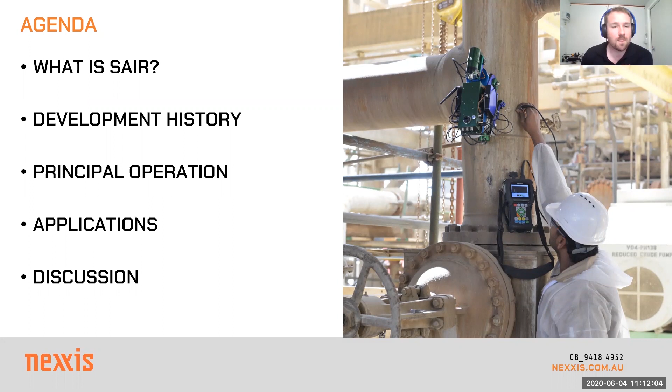So SAIR is Saudi Aramco's inspection robot. It's essentially a wireless crawler capable of performing ultrasonic and visual inspection, and it was developed in Saudi Aramco, and it's been tested and piloted in several of their facilities.

So it went through quite a development through that process of field testing. Then a company called Arabian Robotics Company, which is a joint venture with Saudi Aramco, was established specifically to provide non-destructive testing services into the oil and gas industry and be an avenue to feed in robotic solutions. So Arabian Robotics Company, ARC, is who we've been partnering with to bring this product in.

And they've been quite good at bringing this along the way. I guess the objective for Nexxis is to be able to take a technology like this, analyze it, work out where it's going to work best for our customers, and then build a knowledge base around it so we can make sure it's used in the field correctly, that we can provide training for it, and basically just get it running in the field as it's been intended.

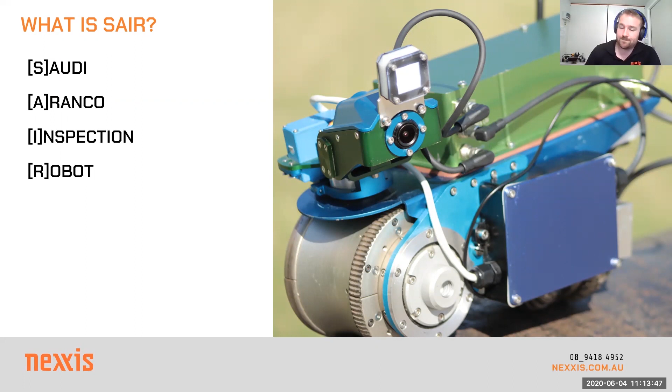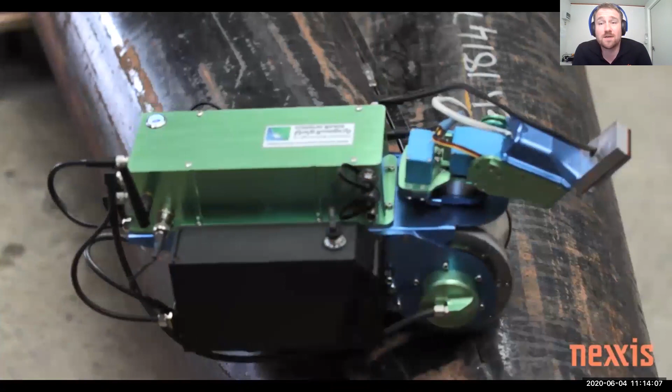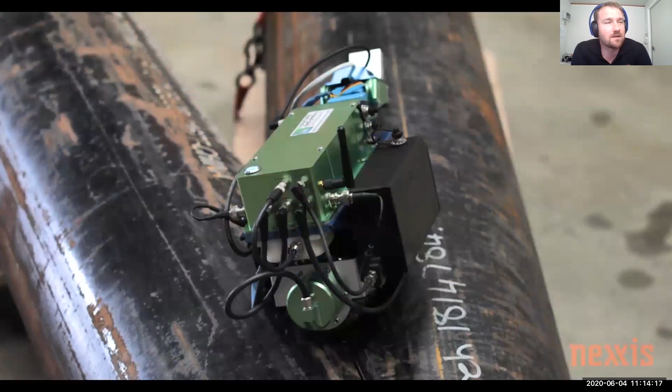So hopefully the video plays through nicely, but this kind of summarizes the idea of SAIR. It's a wireless magnetic crawler robot, capable of doing RVI inspection with a camera, and UT thickness inspection with a probe mounted underneath. Its unique feature is that it's wireless in nature, which is pretty different to most of the other crawlers we've had in the past, which have a tether for data and communications. This has everything running on board, which is quite unique.

And then the other draw card that really drew our attention to it was the wheel mechanism on the front, which has this unique design that lets you transition over curved surfaces without getting jammed up, which I'll touch on when we start looking at the wheel assembly.

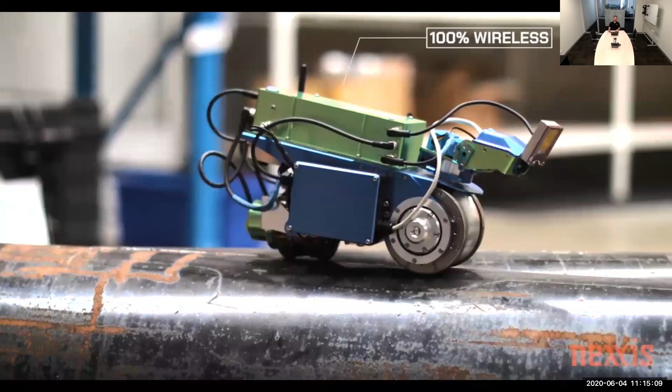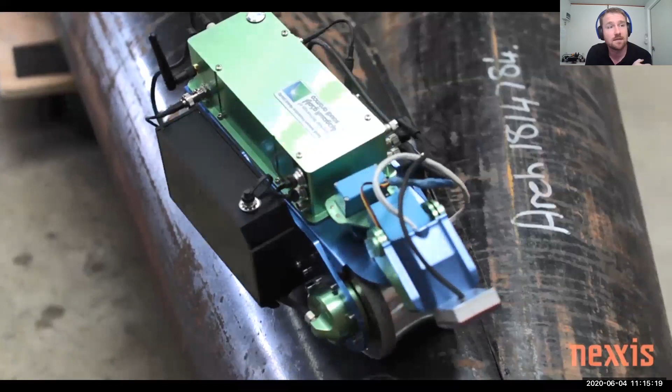The video sort of helps convey the maneuverability of the unit that a picture just can't really do, I suppose. But yeah, as Rick was saying, available on YouTube under our channel.

In terms of development of the unit, it started off as a bit of an R&D project with Saudi Aramco at a university, and went through quite a few revisions there. I kind of like projects that get to go through that sort of inception, because before the finished product is delivered, it's gone through quite a few rebirths.

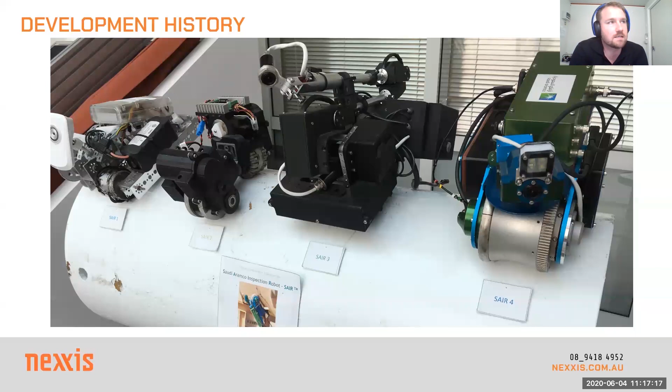So running through the principal operation, I broke it down into its core components. We'll look at its wireless ability, the wheel design, and then how it performs in inspection - the camera on the front, the UT probe underneath, and then the gas monitor that's mounted on the rear.

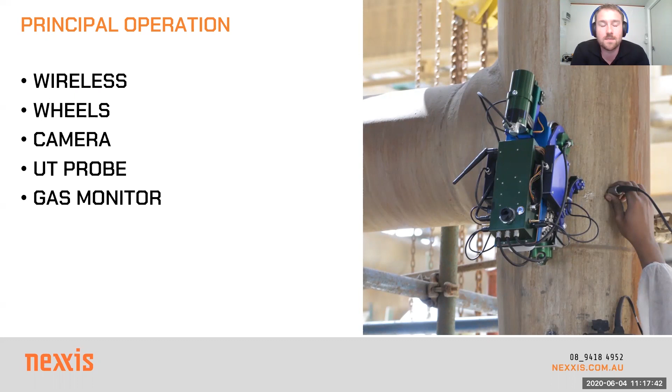So wireless operation, it's a pretty interesting one to bring on site. The unit runs off a wireless interface between the tablet and the crawler itself, and it has a range of up to 100 meters. To achieve that, it uses a wireless booster. There's approximately 2 hours of battery life on the unit, and the tablet controller itself is a pretty nice touchscreen interface that gives you the visual inspection as the camera feed.

UT is the A scan and B scan, mainly for pipe inspection, but it's also used for vessels. In terms of reporting, there's quite a nice interface for logging UT data down a pipe and then circumferentially around a pipe, which is quite good. It collects all those spots and strip scans for you in a nice sequence that then makes it quite easy to do reporting.

Nick, just a quick question that's come through. You're saying 100 meters - can you explain a little bit what frequency that would run on? Yeah, that's a good point actually, which is sometimes a concern on some sites. So it's a 2.4 gigahertz wireless frequency that it runs off.

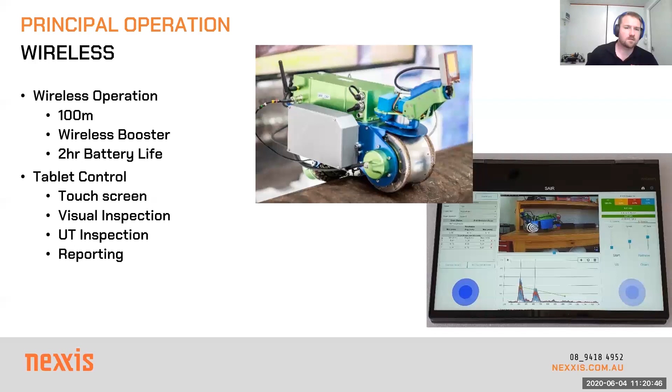Thank you, one last one as well, Nick - complex assets. I guess you're going to show a video a little bit later on, but maybe we can preempt that a little bit. Complex assets, so something like a cargo tank on an FPSO, has some I-beams, has some obstructions - is this something, assuming it's ferromagnetic, that can be used in there? Yeah, so I guess it holds some of the limitations that we traditionally have with most of the magnetic crawlers.

It can navigate over welds quite comfortably, but I guess transitioning 90-degree interfaces, it's not really designed for. But I suppose the answer for that would be that with correct planning, you can maybe deploy this in a sequence that sort of favors how it couples onto the surface.

Yeah, good point. Thanks, mate. Yeah, I guess just the early engagement side of it, making sure we get scan plans right, making sure we know how to deploy, but also how to retrieve. I think you hit the nail on the head there. That's good. Yeah, there's a couple more, mate, I think, but let's go to the next slide, and we'll answer some of these others coming up. Yeah, no worries. Just, I guess we can bring those up as they reach their slide as well.

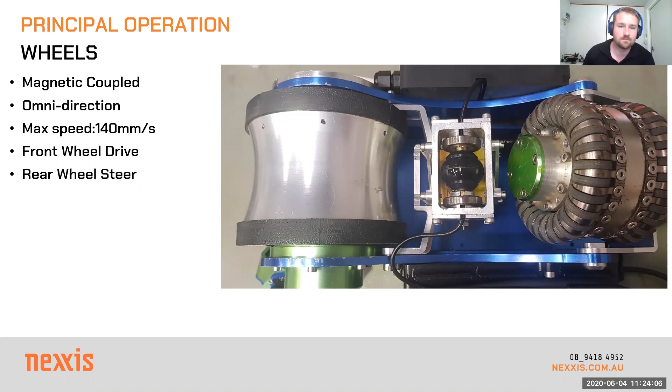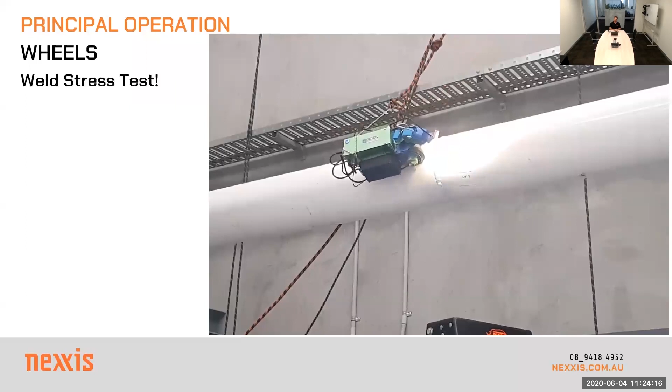Not sure if you're going to cover this shortly, Nick, but things around rust. Maybe you just want to cover that. The question is based around carbon steel, obviously. How does rust affect the wheels?

Yeah, sure, I'll quickly explain this video. I guess part of what we want to do with the unit is do a bit of a stress test, because it's always nicer to figure these things out before it goes out in the field. So hopefully the video is playing nicely for you, but this was us running it over a weld on that pipe and just trying to find a configuration where it might not be able to overcome the weld, or it might lose contact with the pipe.

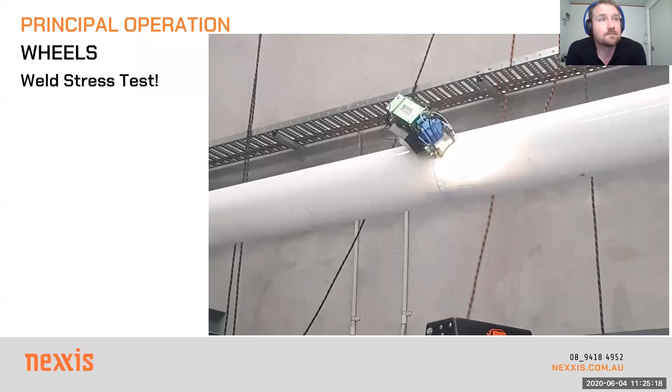So we initially tried a couple of straight runs across it, which was pretty easy. You can see there, the wheels quite comfortably go over that cap. And then started getting a bit more gutsy and said, let's try and do it upside down on a curve, running across the weld. And yeah, it performed really well. I was really happy with how this worked. It kind of shows the crawler's just really effortless in being able to run along the pipe, around the pipe, whatever configuration you want.

So touching on, Rick, the question was about rust, wasn't it? Yes, mainly around how does it affect the wheels. Yeah, sure, so I've done a few tests with this, and it kind of has a similar limitation to most magnetic systems.

At some point you end up with filings and whatnot that pick up off rust on the pipe build up on the wheel. And at some point that does end up locking up the wheel. Much like the other crawlers we have, you have to then take it off and clean it. But what we found here is the front wheel doesn't really suffer too much. It's more the back wheel that will start to need a bit of cleaning and maintenance.

But for the most part, we've tried it on quite a few different assets and vessels. Unless it's on a really degraded pipe, it's not really too much of an issue that we've found. And particularly on something relatively clean, it works really effortlessly.

A couple of other questions that would be good for this slide: thickness of carbon steel. Have you had to play with a minimum thickness that this would adhere to?

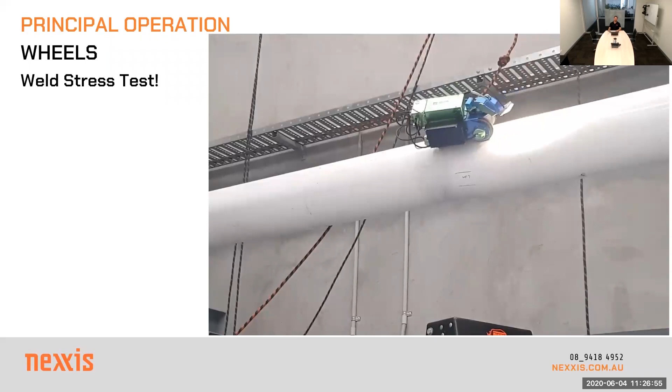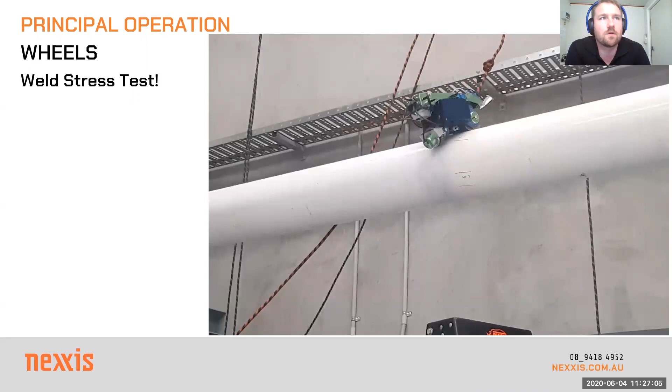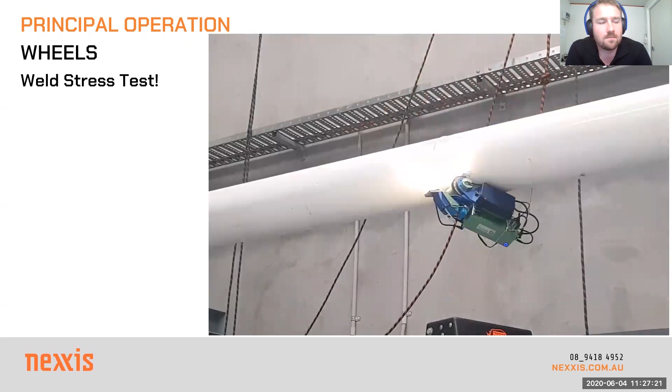Yeah, we've done a few tests in the workshop on plate just to see what the pull force is. We've still got more testing to do, but anything above 5 mil it seems pretty comfortable with. We tried a couple of thinner bits of plate and it became a bit of a challenge to adhere to and steer at the same time. But it's something we're still having a look at.

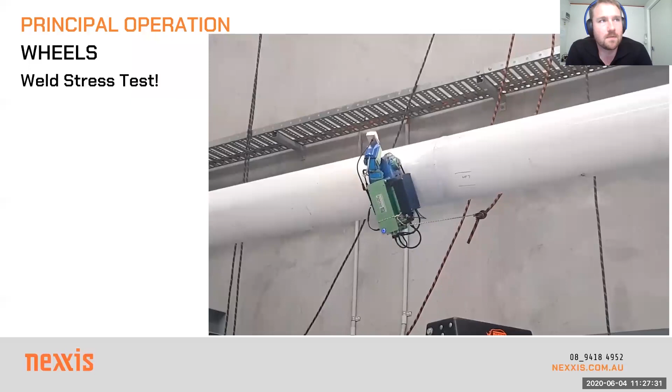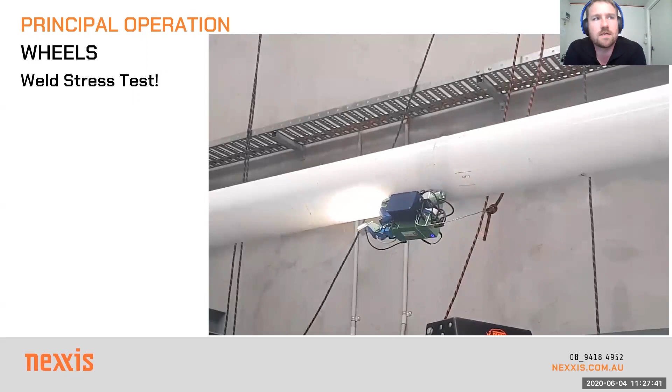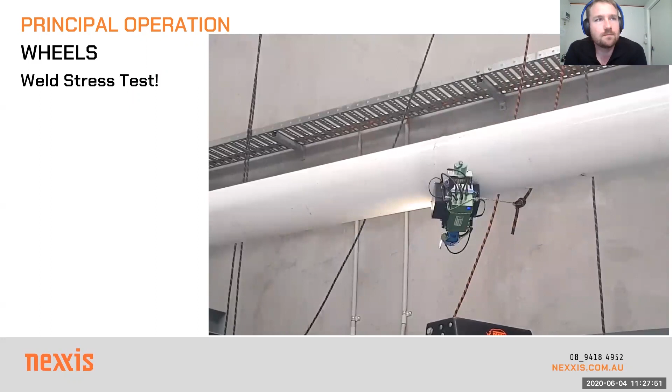The other part we're looking at is coating thickness. I've tried a few different assets with paint and whatnot on it, which hasn't seemed to be a massive issue. Obviously it won't really work on something with thick insulation. But for the most part, it seems pretty much on par with most of our other magnetic crawlers in terms of pull strength, which is good.

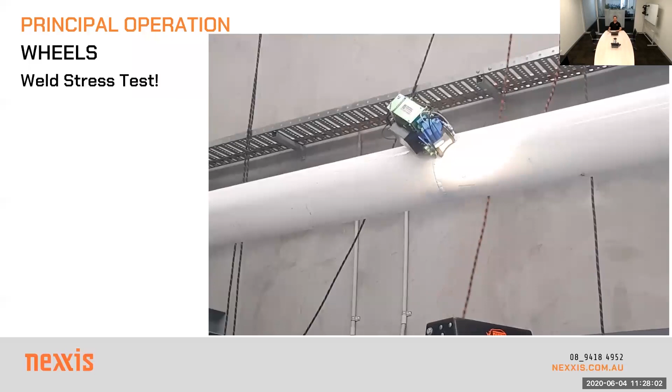Thanks Nick, the next question was actually coating thickness, so perfect.

Are we going to talk about the battery side of things later with some EX, or should I face that now? I'll pick that up now, I suppose.

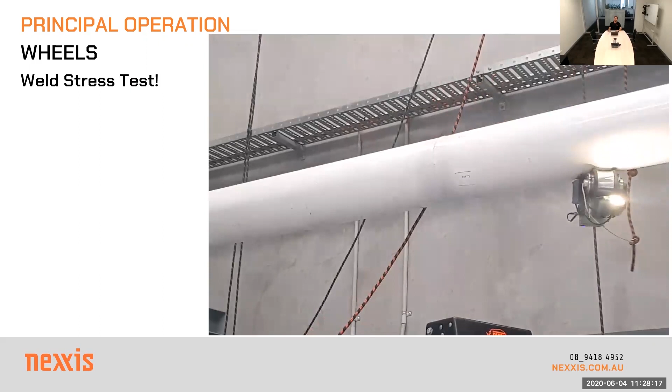Okay, so the question is, being battery powered, how does it work around ATEX, Zone 1, Zone 2? Do we need a hot work permit? How do we get around that?

Sure, yeah, so it does require a hot work permit. It's in the same class as our other systems that run on 24-48 volt DC systems. The battery is a standard lithium phosphate rechargeable battery, which we've found compared to normal lithium ions, in terms of MSDS, is quite a bit easier to deal with, which is good. But circling back to the question, the unit itself doesn't have any ATEX or EX rating at the moment.

That's all the questions for now. One of the things with EX and IS we try to really work with operators on is, is it really required? Are there other options we're looking at instead? What is the Zone 0? What is the Zone 1? Can we move the critical equipment outside of that, then the equipment that goes inside the asset - is there an opportunity to purge, or other opportunities to look at when to turn the equipment on so it isn't a concern.

One of the other things we do is gas monitoring, which you're talking about a bit later anyway, but there are some options. The very first thing for us is, can we look at avoiding having to need that EX, IS, and even ATEX in that case. Just as a side topic, there's also EX certified equipment within Nexxis, depending on the application, so there are some options available. And we're also working on getting a crawler certified within our business this year as well, so there are some options.

I guess touch on why you need to get the crawler up into a difficult space or on the vessel for inspection. The first part of most inspections is an RVI, a visual inspection. So on the front of SAIR, there's a reasonably easy to use 13 megapixel camera with built-in LED lighting.

It's able to pan and tilt around, so it can pretty much look above and around for navigation purposes, and then the camera is able to pivot right down into that curved wheel, so it can get a close look at the surface underneath it, which is quite handy when you set up to do a UT strip scan inspection, like a B scan. You can end up pointing that camera downwards, start the UT inspection, and then collect a visual record and a UT record of the area as you're running forward.

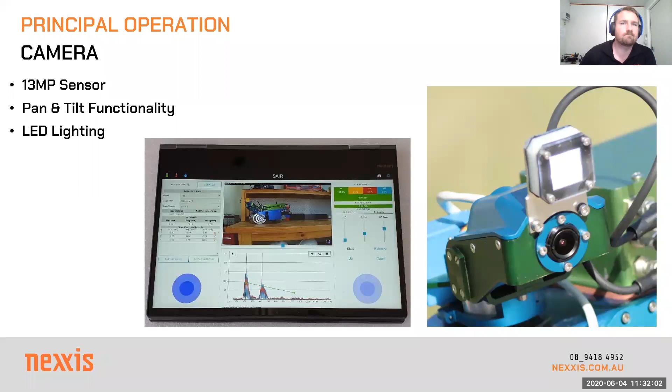A couple of extra really good questions just coming through now, Nick. It's mostly around the physical aspects of the crawler - length, height, width. What's the clearance that you need to pass through? I guess maybe explain a couple of things on length, height, and width.

Yeah, so taking it in those core dimensions: 325 long, 180 width, and I guess the critical one for most inspections is the height, so 215 mils high. Within those bounds, that's sort of what it can navigate around, which I guess is a key one.

And a key application for this would be pipe racking. So you'd want to be able to clip onto a pipe from a comfortable area where you don't need to set up scaffolding, and then start going up and along that piping into the inaccessible areas. So the biggest restriction there is that height limit on any supports or anything that might be in the way.

I guess the nice thing, and part of the core design of it being wireless, is when there is an obstruction like that, it's quite an easy unit to maneuver around the pipe to then find an area where there is clearance and then continue down the pipe.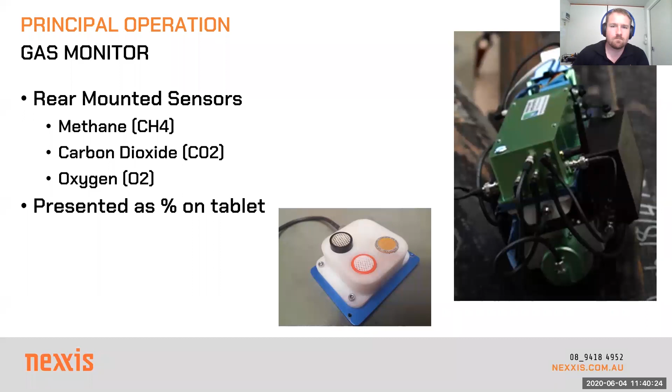So in terms of applications, it really comes down to SAIR being developed to inspect elevated pipework areas that are hard to access or might have been inconvenient and needed scaffolding. And then the other side of that would be vessel inspection as well - again, areas that are traditionally a bit difficult to access. If we can avoid scaffolding to take some periodic UT readings on the far side of the vessel, it can be quite a cost-effective operation.

So in terms of vessel inspection, as we've touched on, we've got the camera for RVI, UT spot readings and strip scans. One of the really nice things we tried out in the workshop was dome end inspection on vessels, which has always been quite difficult to do. It's usually quite annoying to map out a dome end to do spot readings manually, and a lot of the crawlers don't deal well with the curvature. But what we found was SAIR is really good on dome ends.

So the application would see there is to set up SAIR to do strip scans across a dome end and keep doing strips across until we've done an asterisk configuration, I suppose. It gives really nice coverage and it's fairly easy to deploy with the wheel probe, which is quite good. In terms of piping, the smallest it'll operate on is 8-inch, and that's purely a function of the wheel design. It can go smaller if the wheels are brought in closer, but the chassis as it stands at the moment has been optimized for 8-inch all the way to flat.

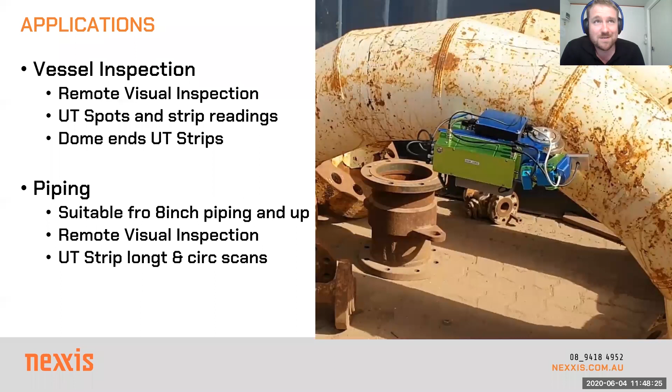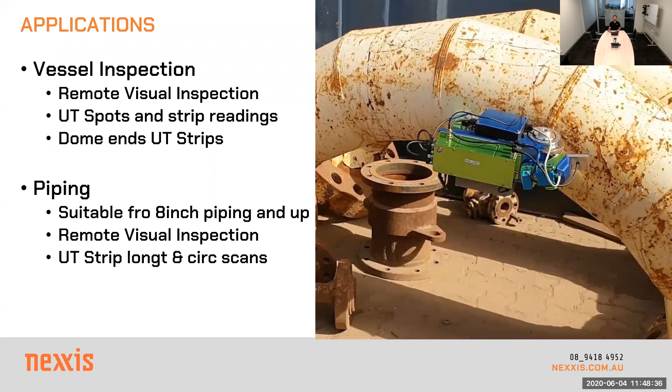So this is another test we're doing. This was on some pipe work, and we looked at an elbow, which is usually pretty tricky geometry to drive on. We can see this weld was a bit of a challenge initially for that omnidirectional wheel, but with the right alignment, we end up getting over it quite easily.

This shows the ability for it to quite comfortably go up the pipe, around the pipe. It's not really even that it needs to go straight down the pipe or directly 90 degrees around it. It's pretty comfortable just doing a helix path, or just sort of freestyling around the pipe, I suppose.

This was the point where I was using the camera to look at a few bits on the pipe, to show its functionality there. I think it just goes out of frame, but in a minute it'll drive down again and we can see it. There we go, that's better.

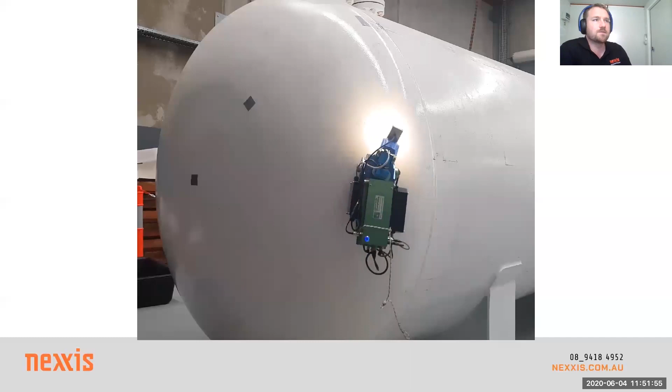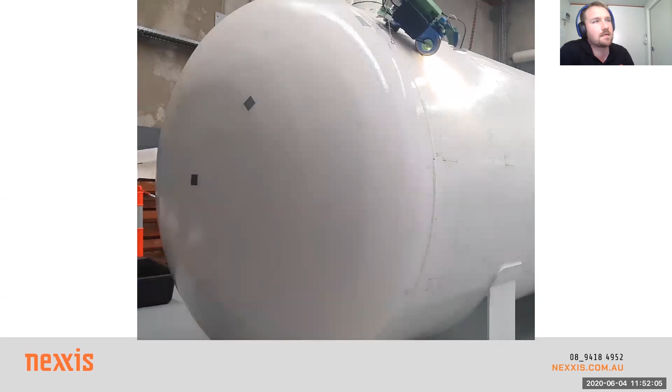This is just another one we've got. This was the dome end, so this was just a bit of testing to see how it'd go with the welds on the dome to the rest of the body, and then seeing how it goes with the way the curvature blends in and out as you're going across the dome end. And yeah, it performed really well, I was really happy with it.

Do you remember the approximate diameter for that one, Nick? I don't, I'd have to check. Couple of meters? Yeah, at least, yeah.

Brilliant. So that's my rundown of SAIR, a new bit of technology that Nexxis is introducing to our fleet. As a summary, its main appeal is for RVI and UT thickness inspection, magnetic coupled wheels so carbon steel applications, wireless connectivity so 2-hour runtime off the batteries, 100-meter range using the booster, gas monitor on board, and the key applications being vessels internal and external, and pipe work externally.

I'll open up to any extra questions now, Rick, if you've got them. Yeah, it's an interesting one. If you don't mind going to the previous slide, I guess they're asking about trickery in the video. Was that done at full speed?

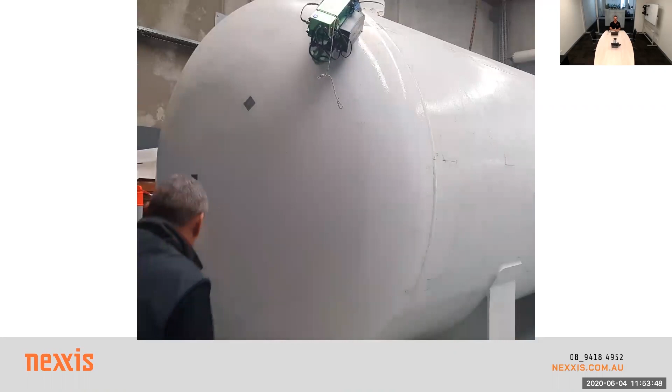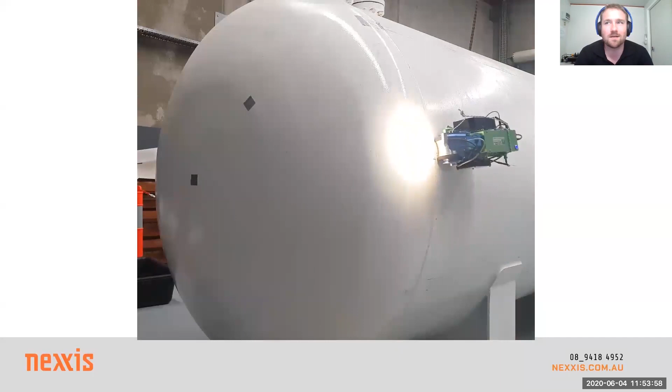Yeah, I mean, Colin's my little check there as he walked past, he didn't seem to accelerate past. That's good, mate, it's a good question, I enjoyed that one. Yeah, I guess it is pretty zippy compared to some of the other crawlers we've got.

Another question, and I'll open this one up a little bit around environmental ratings. So things like dust, things like water. Does it have a rating? And then, knowing the answer, can you talk about maybe some of the other options that we can do with like a splash zone or where there is water?

So the current version we've got at the moment doesn't strictly have an IP rating approved for it. In terms of the design of it, everything has gaskets, seals, the connectors are splash proof. I wouldn't say it's at the point where it's subsea rated, so we can't dunk it underwater yet. I guess you could say it's subsea rated once, and then after that it's out of operation.

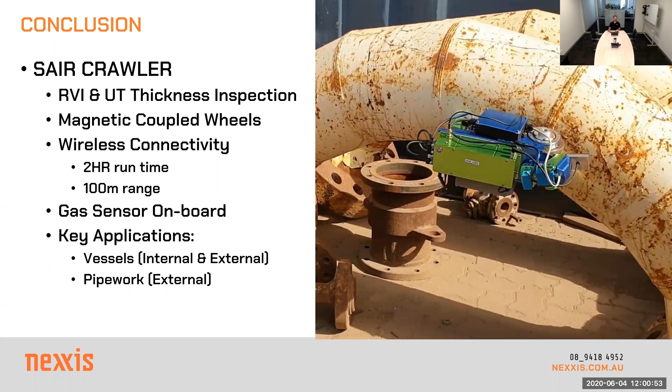That's perfect. Thanks, Nick. No other questions. Thanks for your time as well, mate. And thanks everyone else for your time as well. We'll see you next time. Great. Thank you, everyone.